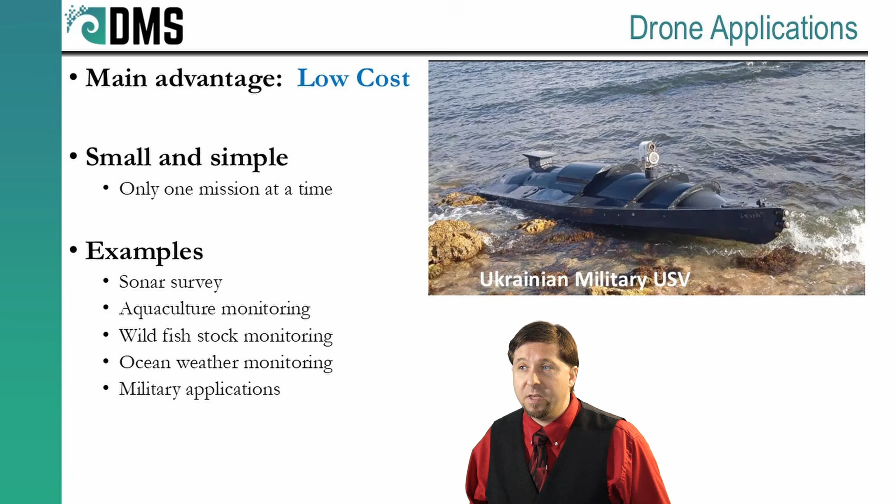So the first problem to look at, stability. How do we keep the drone upright? Better question, do we actually need the drone to stay upright? Most of the rules and standards for ship stability derive from protecting people on board. That's the main reason that we have stability rules. We devote a lot of effort into limiting the ship's roll. Because if a ship rolls all the way over to 45 degrees, people are going to fall and get injured. Objects are going to fly across the room and hit people.

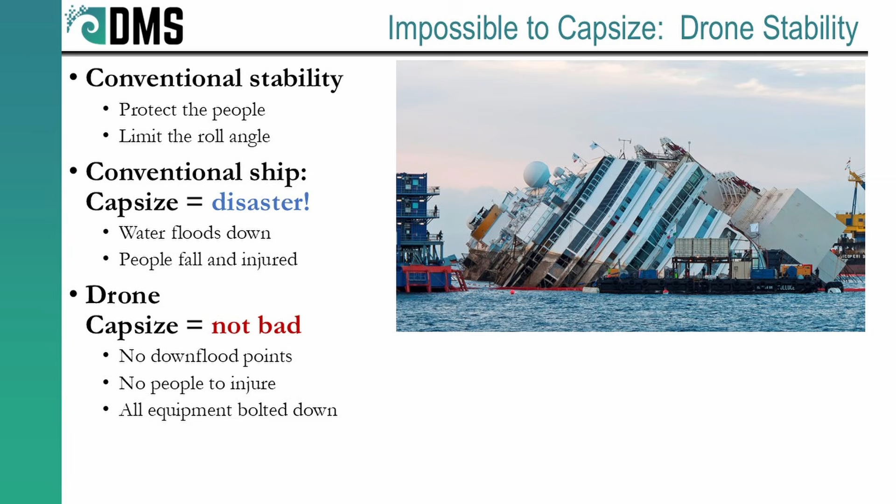Bad things all around. And you'll notice I'm talking all about the people. The ship itself probably doesn't care if it's rolled over to 45 degrees. But people, they break much easier than the ship. So let's look at this again. No people means that we can throw out most of those rules. For example, most ships come with a myriad of openings on their main deck. We're talking about doorways for the people, air vents to get oxygen down for the people and the engines.

All of these openings are called down flooding points, because if they ever go underwater, the ship is going to flood from the top on down. Now, conventional stability rules, they invest a great effort to ensure that those openings will always stay above water. But this is not the case for drones. We can build drones more like a submarine. Seal up all those hatches. Even if we're talking about engines on the drone, we can temporarily seal the air vents if that drone goes underwater. So drones can really embody a watertight design, which makes stability far less critical.

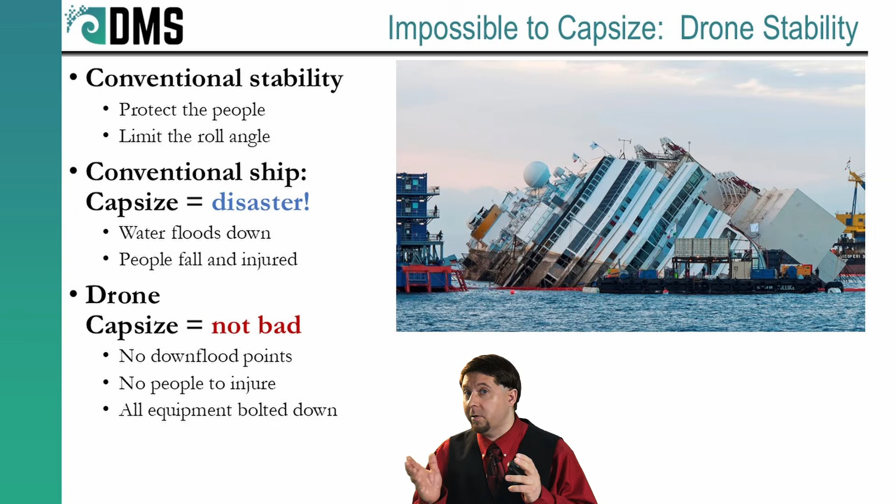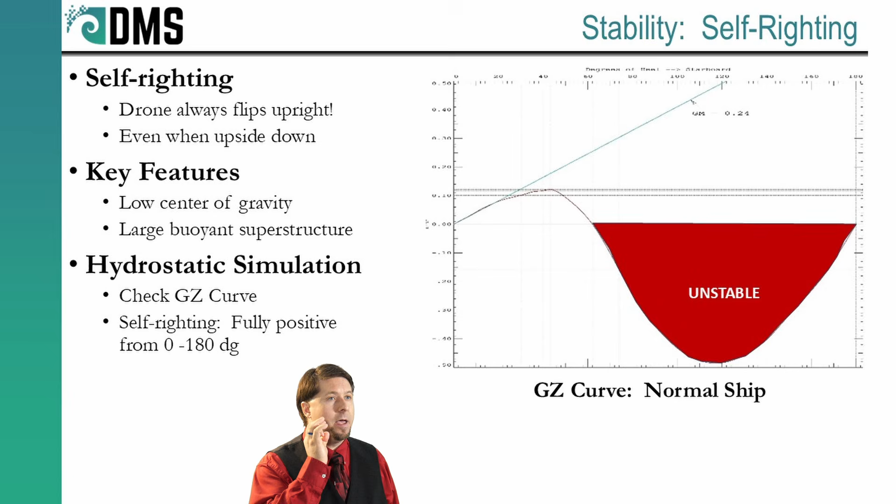That said, the small size of a drone does present some new challenges. The drone gets smaller, but the ocean did not. Your typical drone is only 20 to 30 feet long, 6 to 9 meters. But it's going to be facing waves that dwarf it when it's on the open ocean. The drone will capsize. It's not a question of if, it's a question of when. It just takes one unlucky combination of waves for the drone to completely flip over. We guard against this by designing most of our drones with a self-righting capability.

Self-righting ensures that no matter what, the boat is going to return to an upright position. There are no machines required for this, no technology. Self-righting is a capability that comes purely from careful design of the drone hull shape. We start by creating a very low center of gravity. Keep it very low down. But the real magic happens in the reserve buoyancy. This is the section of the hull that is currently above water. And if we flip over, what happens when that now enters the water?

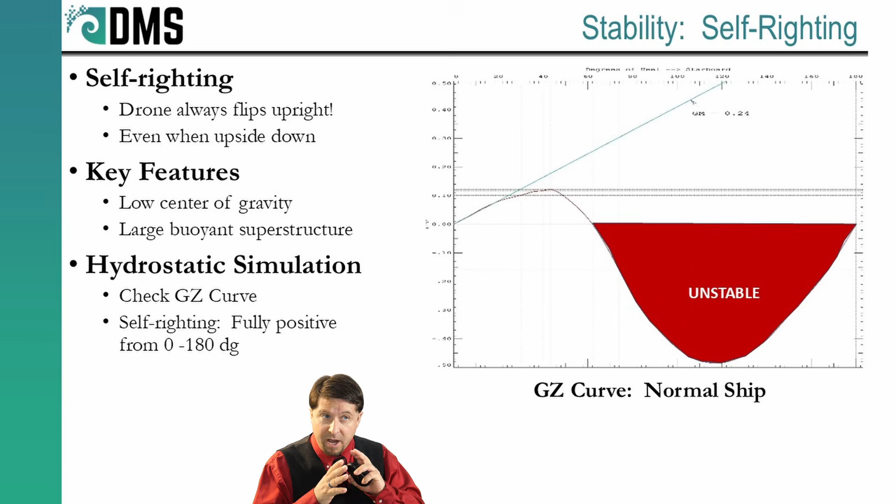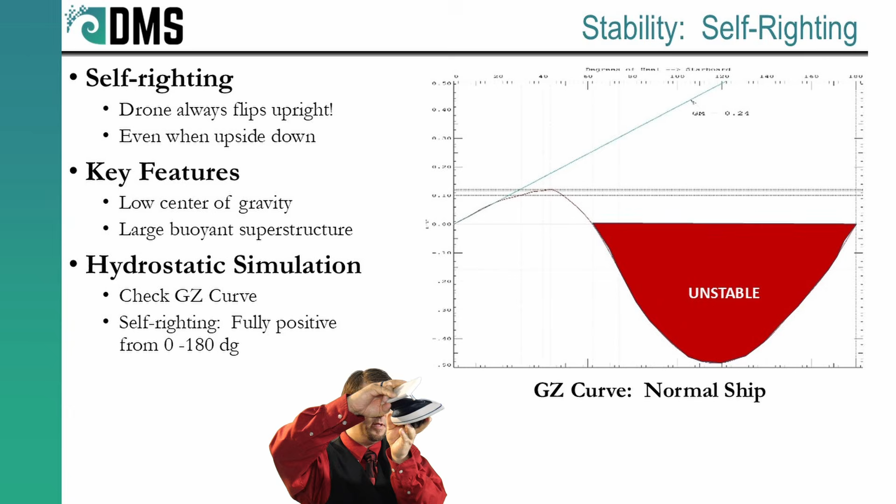First thing we do is ensure this entire hull stays watertight. Top and bottom, it's all going to keep the water out. As that drone rotates around, we include large buoyant structures on the top. These might be tall, watertight deck houses, or a flotation bag on the top of a large arch. The key principle is that these structures have to be tall. In normal conditions, these structures are going to stay out of the water. They don't do anything. But if the drone capsizes, all of that goes underwater and turns into extra buoyancy. It ensures that the drone can't find a stable resting spot when it's upside down.

Its only choice is to flip back upright. Now, this is not easy. Drones don't naturally tend towards self-righting. We need to be very careful in our design work. To get this right, naval architects will simulate the drone stability and check it on the computer before we ever

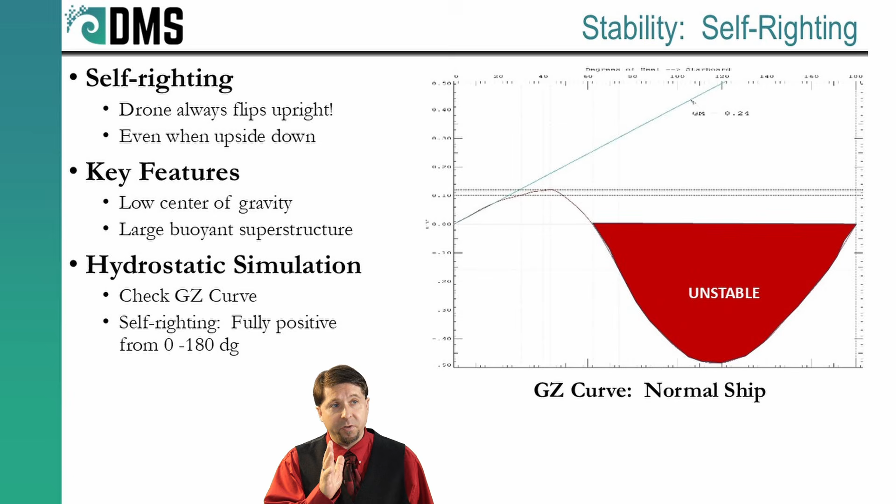build the real thing. When we're simulating stability, we look at a graph called the righting arm curve. That's the graph on the right side of your screen. Naval architects, they get a lot of information from this graph. For self-righting, the main thing we need to know is if the curve goes negative.

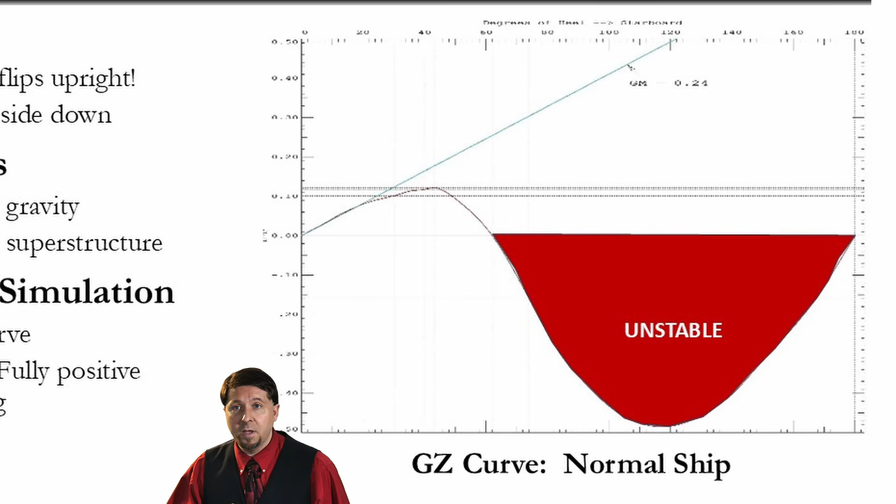On a conventional ship, the curve starts positive, and at some critical angle, things swap around, the curve drops below and goes negative. That's the highlighted red region in this graph right now. A negative curve means that the ship wants to be upside down within that range of angles. Negative stability. And if a conventional ship were to capsize and rotate into this region, it's going to stay capsized.

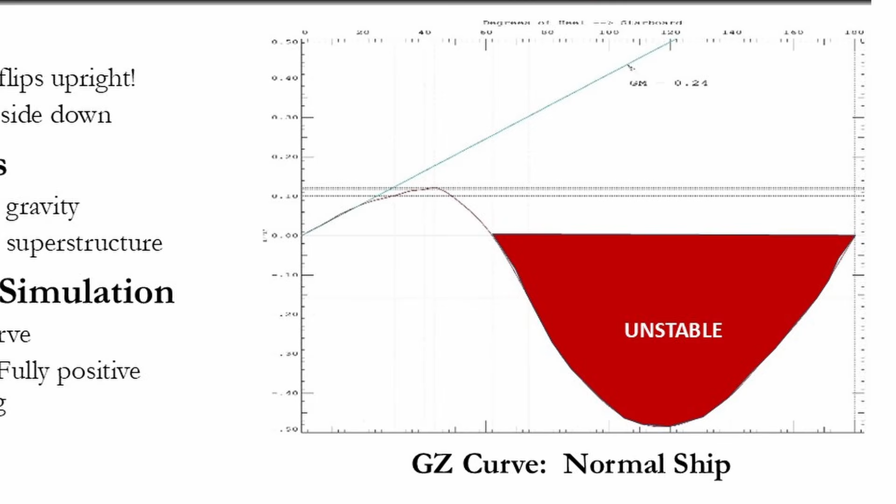The classical strategy for stability worries about that crossing point from positive to negative, and we try to push that crossing point as far out into heel as possible. We want to make sure that the ship never actually gets to that crossing point. But with a self-righting ship, we do it a little bit different.

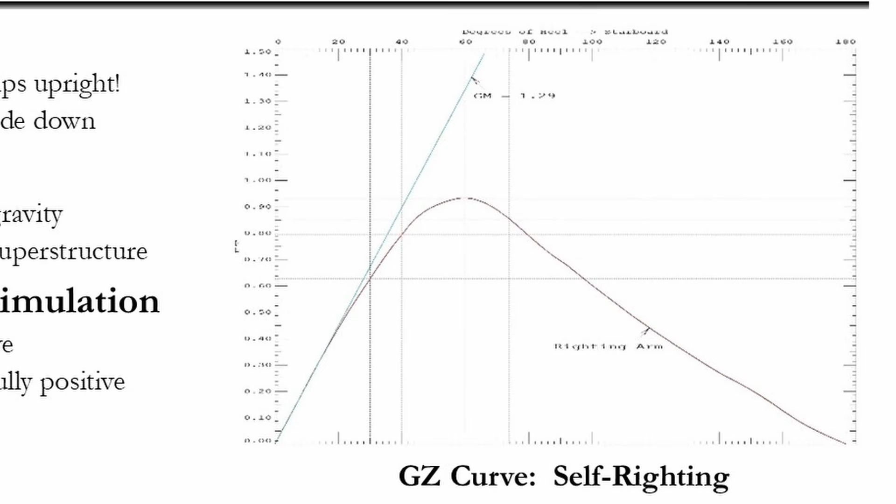The graph on your screen now shows a GZ curve for a self-righting drone. And you'll notice that region of negative stability, it just does not exist. In a self-righting ship, the curve is always positive over the entire range of heel angles, all the way from 0 to 180. No matter how far you roll this ship, it is always going to want to go back upright. And working with a naval architect, we'll be able to tell you that's going to happen before you ever

build the first drone. Now, ironically, the biggest problem with self-righting does not come from capsize. It comes from the machinery, especially any fuel-guzzling engines. Those lumps of metal, well, they were designed to work upright. So we need to create several special adaptations to ensure that when the drone flips over, the engine still works again by the time we get back upright.

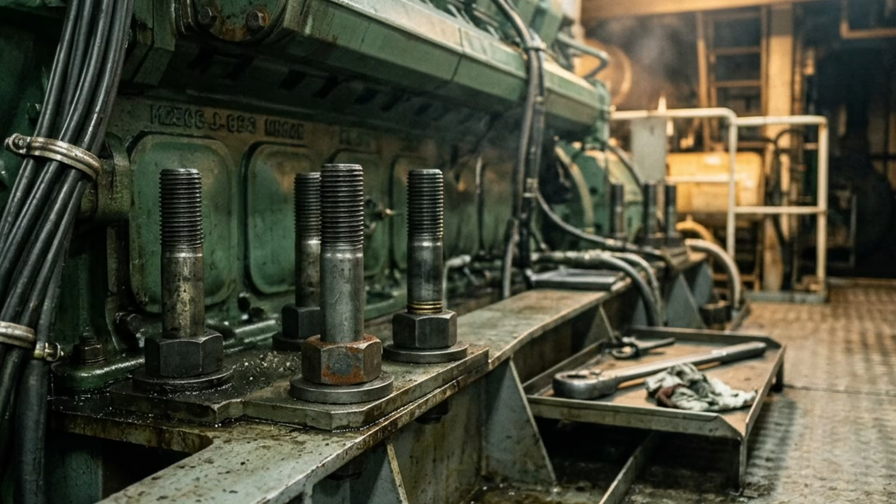In general, the strategy here is to shut down the engine if we capsize. There are several devices that then protect that engine, ensuring that we can restart it when we're back upright. First off, we're going to need some stronger bolts to secure the engine. Most of the time when you mount an engine to a ship, those bolts, they're not designed to completely suspend the thing upside down. So we got to make sure we protect that.

Then we look at putting in a cutoff switch, something that's going to detect when you're going upside down and stop the engine from running. Otherwise, you run into the problem that the lube oil is now draining to the wrong place and it's not protecting the engine. Things can start to overheat.

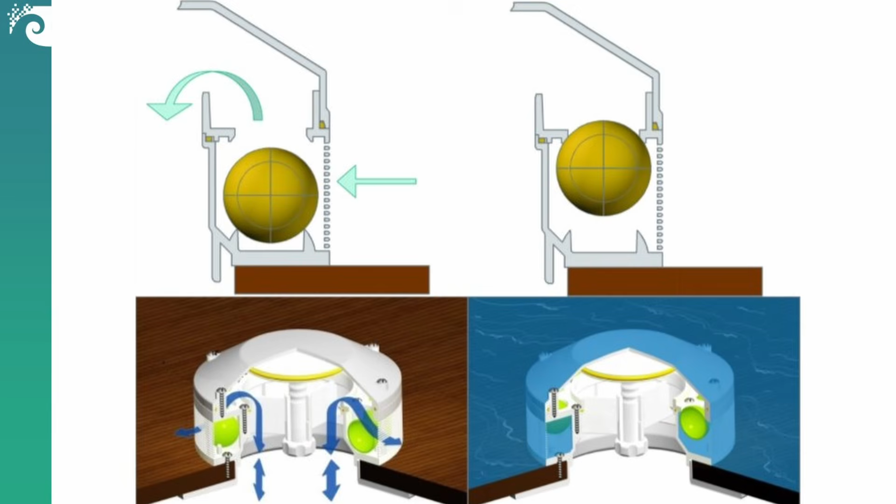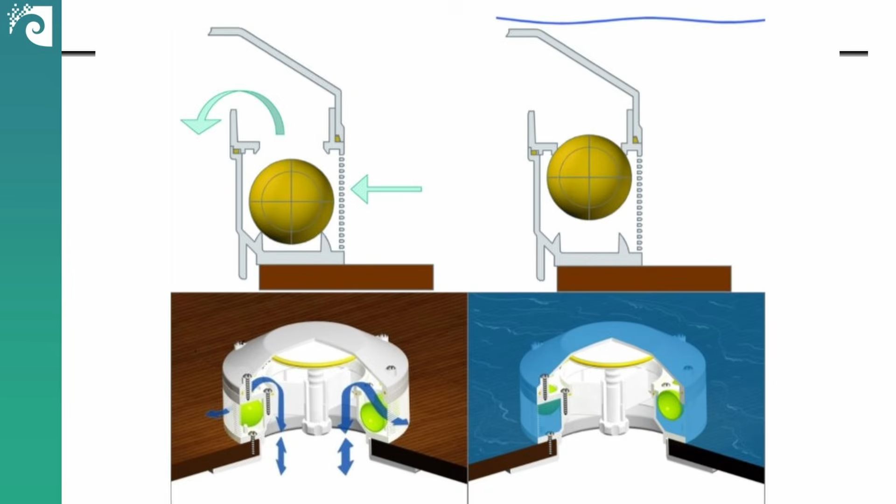Then we have to look at the air. The engine pulls in air from the exterior vents. Well, if you flip upside down, those exterior vents are now a downflooding point to let in water. So we install special valves that are going to close in the event of a capsize. But don't forget, the engine has a place where it sucks in air, and then an exhaust where it gets rid of the air. So just like with the air intake, we need to close that exhaust when it goes underwater.

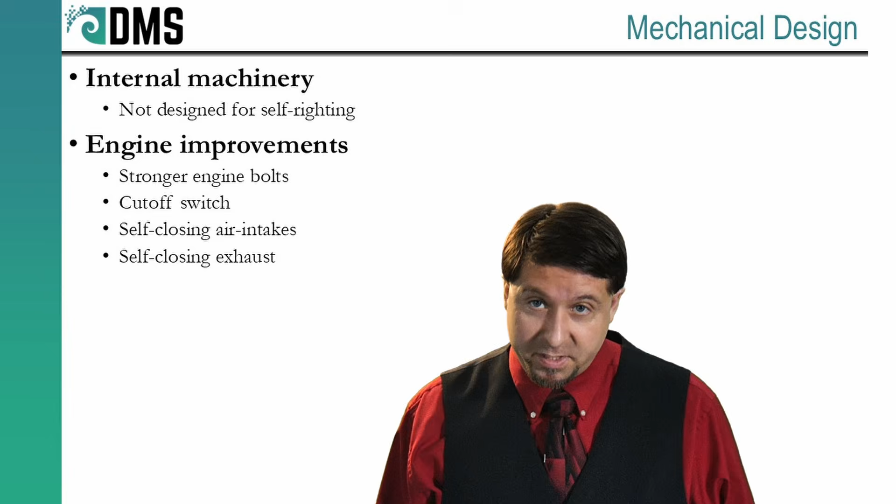Naval architects know solutions to each of these problems. The trick comes from recognizing the problems in the first place. And that's why you need a naval architect who's trained to think about all of this system integration. We look across different disciplines of engineering to understand how that self-righting is going to create new requirements on different mechanical systems. Let's talk about power management now.

Preparing for the long haul. The biggest challenge with drones comes from power. Now sure, you're going to find plenty of them that can get by with nothing but a battery and an electric motor. They can last for a few hours, maybe a day. But for long endurance missions, the battery doesn't cut it. We can't just supersize the battery, that adds too much weight.

So when we're talking about long duration and storing massive amounts of energy, we need to get more efficient and more creative. And there are two major solutions. The first one is engines. Engines offer the more predictable option, and we tend to like predictability. When it works, the engine always provides reliable power, matching all of our needs. One example of this is the drones designed by Chance Maritime.

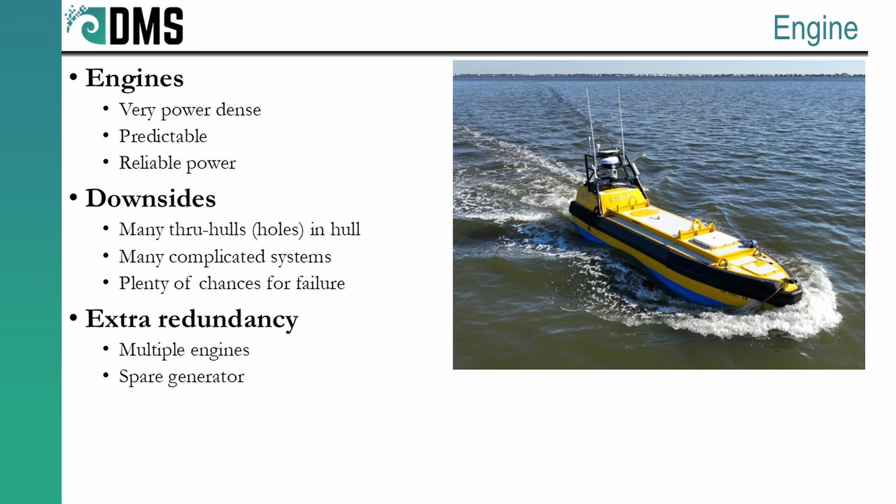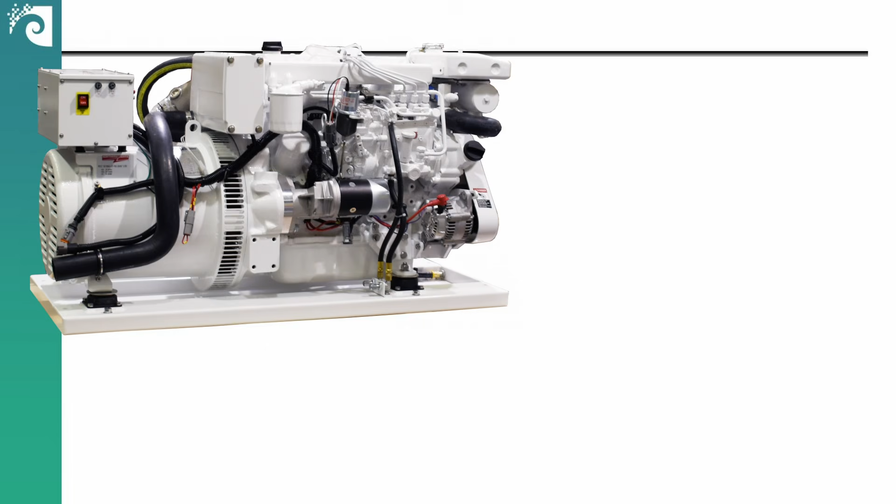But those engines also introduce a lot of complexity, potential points of failure. So we can't use the engine as the sole source of power. Because remember, the computers and the controllers on the drone, they all require power. And if all of our power is coming from the engine itself, well, if we lose power, we lose communication, and now there's no way to restart the drone. Nothing is listening for the restart command. So even when we're using engines, expect to have a backup power source, either a generator or a large battery setup.

Plus again, that engine requires air inlets, outlets, cooling. Those all turn into through hulls, holes in your hull. Every hole is a point of potential flooding. It's a risk that we have to consider. So in short, yes, engines do work great when they work. But if anything goes wrong, we are going to face limited troubleshooting options when we're stuck back on land.

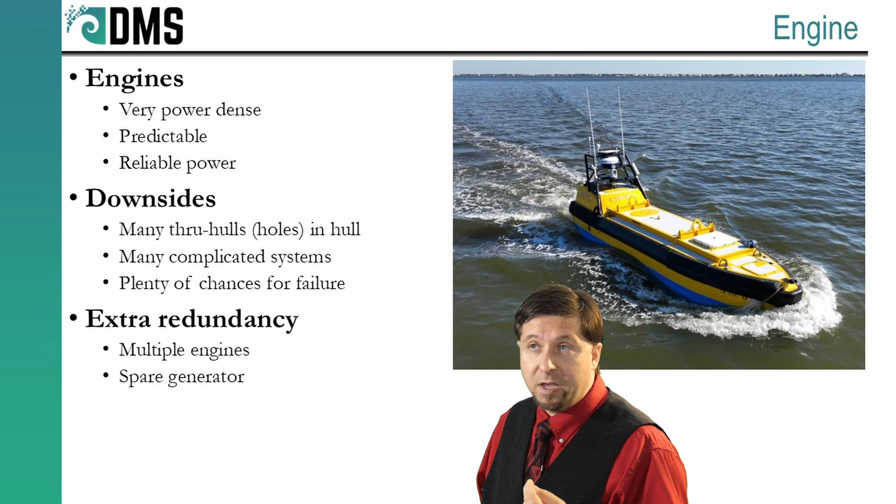That means that even with the engine, we need to build in extra redundancy. Multiple engines, spare generator, batteries. It's not as simple as it looks initially. Your power system starts to get a little complicated. Well, if you don't like that, the second option is renewable energy. Harvest power from the environment itself.

Now this tempts a lot of people. They think, oh, that means unlimited power. I can do whatever I want. But here's a little note of warning. The sea doesn't really care about you, and it's not going to cooperate with your power needs. There are three main sources if we're talking about renewable power: wave, wind, and solar.

Now wave power is the most abundant, but it's very difficult to harvest. There are no commercial off-the-shelf options. You can't just go down to Acme Wave Company and get a wave generator. So wind is the next option. We see this most often as sail propulsion, with the Saildrone being a prime example.

When we're looking at sail propulsion, that can provide both propulsion and electric energy. Many of these drones still include a propeller that's driven by an electric motor. The real advantage here is that if the sail is pushing us forward, we can now take that propeller and use that motor in reverse. The propeller acts like an electric generator, slowly recharging the batteries. And that's how wind tackles the power of propulsion and all of our onboard electricity.

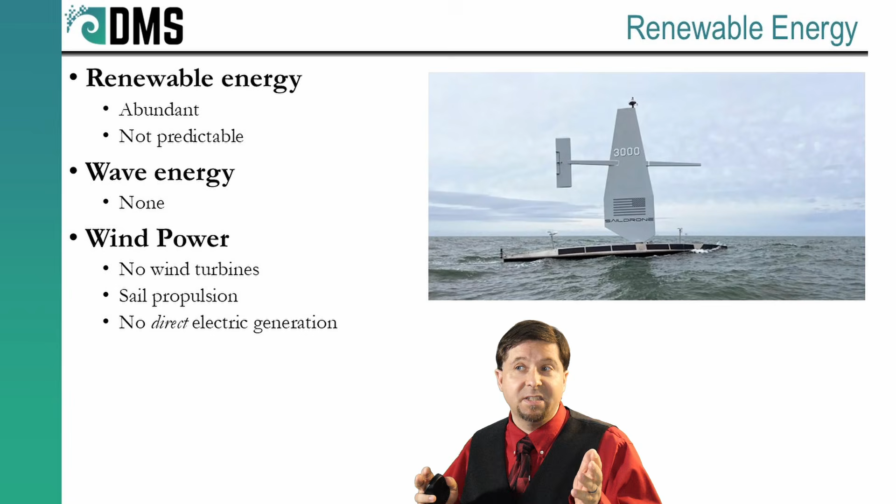Of course, sails only work when the wind blows. So we come to option number 3, solar power. This is favored for its mechanical simplicity. If you look at a solar setup, there are no moving parts. That seems like a great idea. But solar power really depends on the environmental conditions.

Your average solar-powered drone only contains a battery to last 1 to 2 days. So in terms of power management, you're going to need sufficient solar energy every single day. You need to be recharging that battery every day. If we're looking at that kind of daily dependence, it asks the question, how big of a solar panel do I need? Now you might think this is easy. Just go look up the average solar output and size your panels.

But in this case, you can't rely on the average. Average means that half of the time you're getting less than you expected. Well, if you need that power output every single day, you can't be suffering half the time. So we need to size our solar panels for the darkest, cloudiest days in the year. If our drone is operating near the equator, those dark days are still pretty abundant amounts of sunlight.

But if you're all the way up in the northern latitudes, winter is a different story. That brings very scant sunlight and lots of cloud cover. In those scenarios, a solar panel might only produce 20 to 30% of its rated power. Your location on the planet dictates the viability of solar power, so you have to be very careful about where your drone is going.

Just like with engines, when we look at renewable energy, there are pros and cons to every single option. And just like with engines, the recommended solution is that we install a combination of different power options. Engine plus sail, sail plus solar, or even solar plus wave. The trick is to find a combination of the lowest cost and the lowest weight, because remember, extra weight adds to the power requirements.

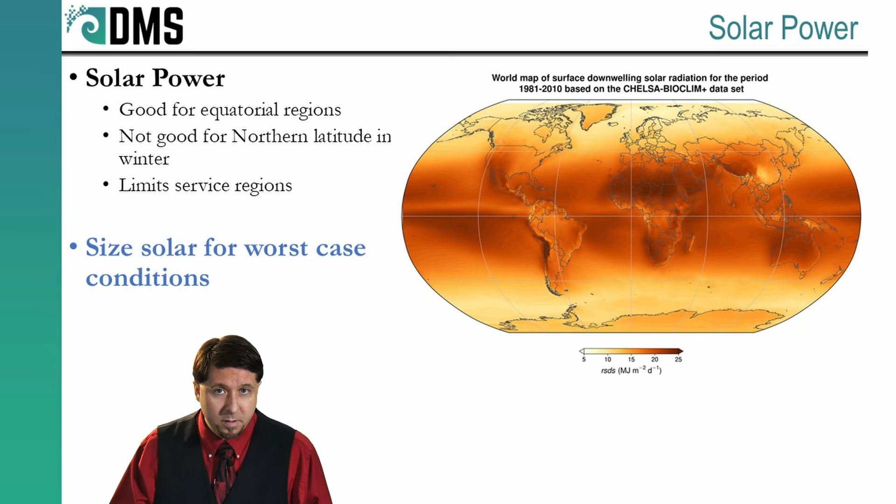This does really take some careful planning, studying the local variability of your renewable resources, but when it's done right, you get a situation where the individual power source is small, but the collective whole of all of your sources offers abundant and reliable power.

What to do when something breaks? Because if it breaks on a drone, you can't fix it. You are still stuck back on land. And things do break at sea, all the time. Take the example of the motor vessel Dali with the Baltimore Bridge here in the USA. They only had a momentary equipment failure, but that was enough for the ship to lose control and create a massive collision.

When we're thinking about equipment failure, we need to think about the risk of the damage our drone can do. This isn't so bad if we're talking a small toy that only trolls around in harbor. Worst case scenario, you've lost a small, cheap drone. And small toys can't do much damage to any surrounding property. They don't make much of a battering ram if it's something only this size.

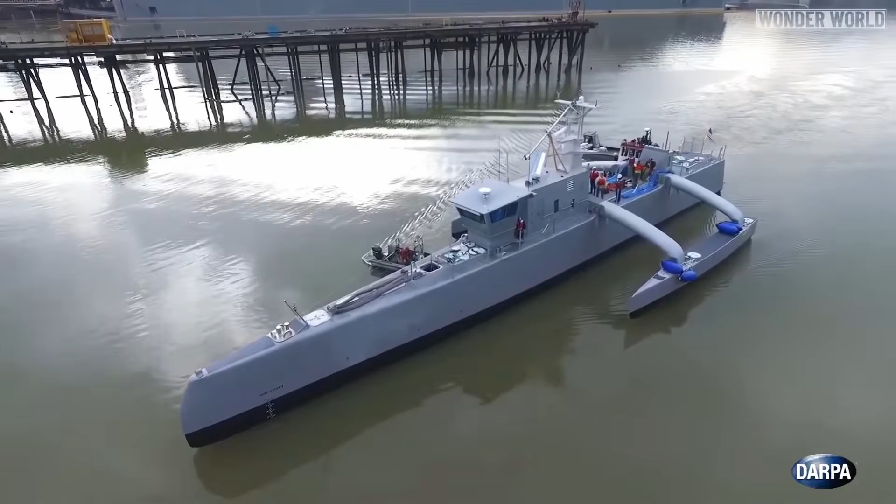But for the long endurance drones, we can't really afford to lose that drone. That costs a lot more than a toy. If you're talking about a 40-foot long or 12-meter long drone, that thing gets pretty expensive. So as we expand into these larger and better drones, fault tolerance becomes critical.

Your average manned vessel comes with plenty of fault tolerances. Think about all of the fuses on a ship electrical system. These are a great idea. If something goes wrong, the fuse blows, protecting the rest of the system, and it isolates the problem. Now just fix the problem, replace the fuse, and you're back and going. Very tolerant to faults. Except, how do you plan to do that on a drone?

Remember, you are not there. You can't touch the fuse. Most drones are going to employ redundancy to get around this remote problem. If a system goes down, you don't try to fix it, you just turn on the backup. That's especially important when we talk about communications. If we lose a communication link, we lose the drone. So we're definitely going to have multiple ways to talk with our drone.

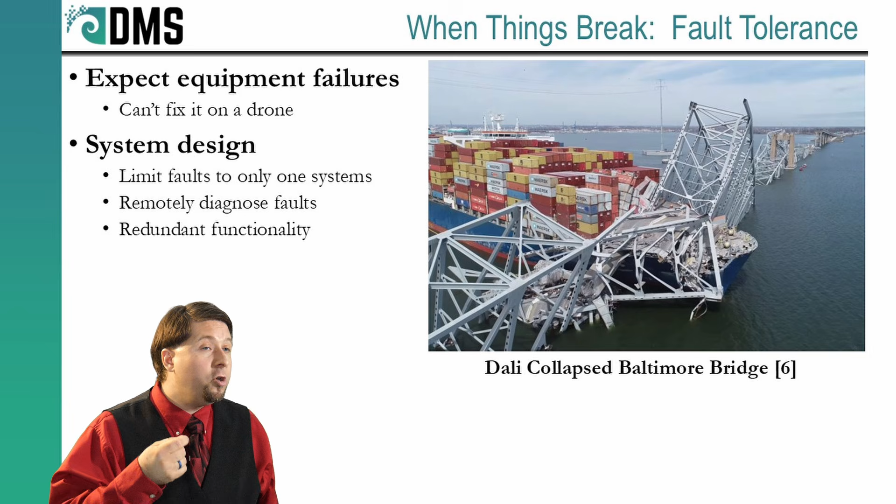And when we're talking about small electronics, this redundancy makes sense. It's relatively inexpensive to add a second GPS receiver. But if we start talking about larger systems, that becomes more complicated. Do you add a second engine? What about your electrical system? Do you need a second generator?

So let's look at that example of redundancy on an electrical power system. Do we build a completely redundant power supply? Double the electrical wires leading to every single instrument and device? Well, first off, that just doubled the cost, making things very expensive and very complicated. If you think about a redundant power system, I need some way to keep that backup power isolated, because otherwise, whatever fault killed my primary power might bridge the gap and do the same to my backup power.

So now we need a way to connect our backup power to all the systems while keeping it disconnected normally. But we also need a way to switch from primary to backup power. Well, normally those switches require power sources themselves. So now I have a tertiary power system just to power the switch from my primary to my secondary. Wow! That is just a lot of switches and wires and a lot of complexity. Aside from the cost, more complexity adds to your risk. It means that there are more things that can break.

So instead, most drones don't come with complete full redundancy. If something breaks, the drone is going to switch to a recovery mode. At that point, we don't expect the drone to have the full capability to continue its mission. We're just trying to get it to return home safely. Recovery mode might mean something simple, like a radio beacon, so that we can go out and find the drone. Or some drones might use a reduced propulsion system that allows it to limp home. We don't have a fully redundant engine, we just have a backup thruster on a battery.

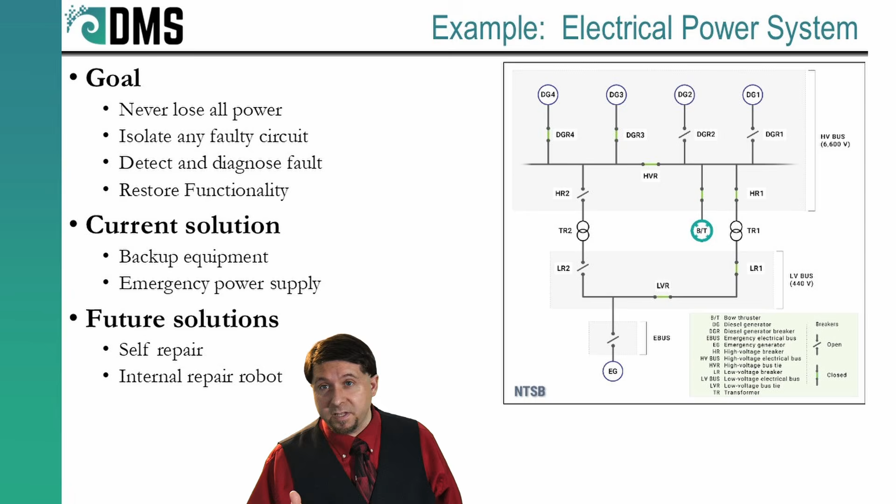The details of disaster recovery, they change with each drone, depending on the systems on board. Most of the drones these days can still continue with one or two minor faults, but they're going to run for home if a major fault happens. But what if we have two major faults? Well, now things don't look good for our poor little drone. I have to admit, when it comes to drone design, fault tolerance still needs improvement. The next major advancement that I really want to see is self-repair. Show me a drone that can change its own fuses.

Now, I do see some nascent signs of this already. Some operators equip their drones with cameras for self-diagnosis. For example, I saw one operator, they have an underwater camera that is pointing at the propeller. That is really critical when you're diagnosing your loss of propulsion. Did you lose power, or is the propeller just clogged with seaweed? That little camera solves this problem.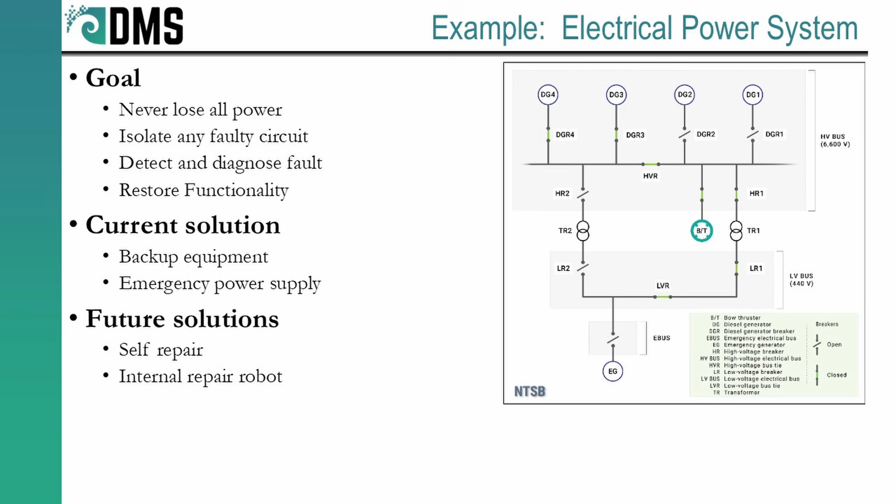So we still have a ways to go, but we are working on solutions. And I really do look forward to seeing the next step, when a drone would contain its own internal repair robot. I think that capability is going to enable a lot of trust for larger drones and better autonomous operation. Let's wrap this up.

Drones play by different rules. Their small size and their challenging power requirements, that creates a different philosophy when it comes to ship design, different problems to solve. And some problems still suffer from imperfect solutions, like fault tolerance. But that's really the beauty of the design process. We try different solutions, which help us narrow down the exact problem that we're trying to solve.

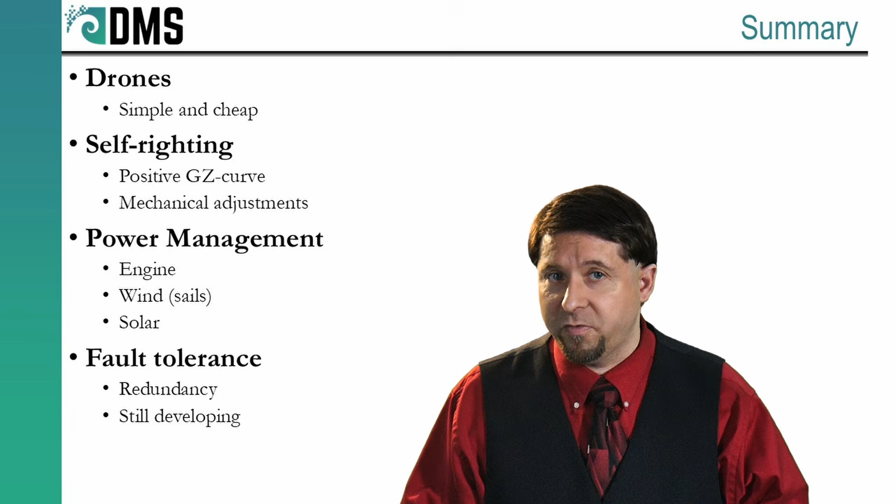The strength of human imagination can envision a solution to nearly any problem. And as USVs and drones continue to evolve, their story is going to be the story of creating a clearer definition, a better understanding of the problems that are associated with drones. Each drone that we see out there is a step towards that clarity and progress towards the perfect design.